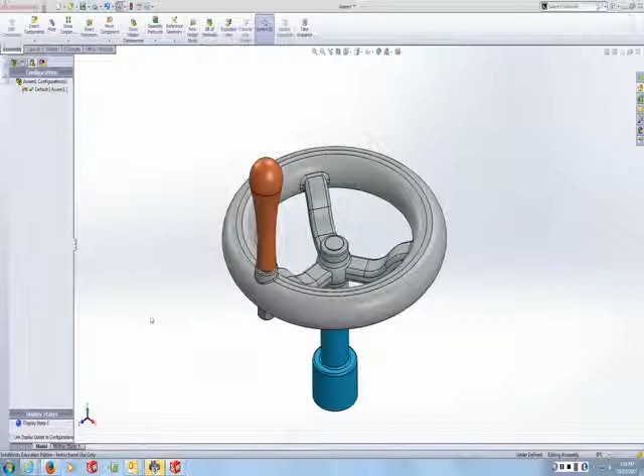Okay, today we're continuing our discussion about assembly drawings, or creating assembly drawings from an assembly. The first major step we've already gone through is mating all the parts together so that they fit and look like the thing would function. The next step is to take them apart, that is to explode them apart so we can see how the pieces go together. You'll see this in IKEA how-to manuals, how parts go together on furniture you bought, or just about anything you have to assemble yourself. This is going to be our assembly drawing. It will show each of the components as part of the assembly, an assembled view, an exploded view, bill of materials, and balloons.

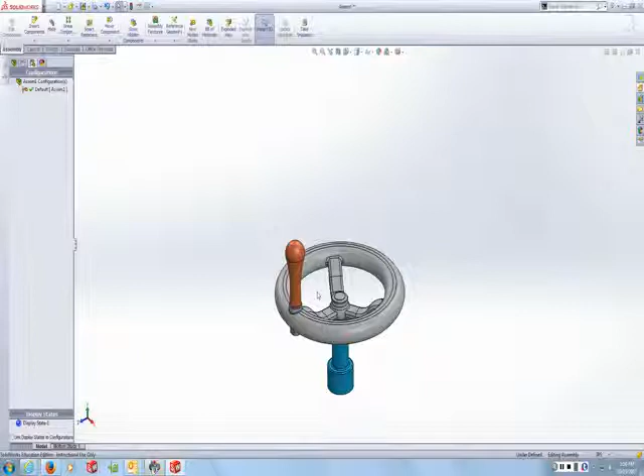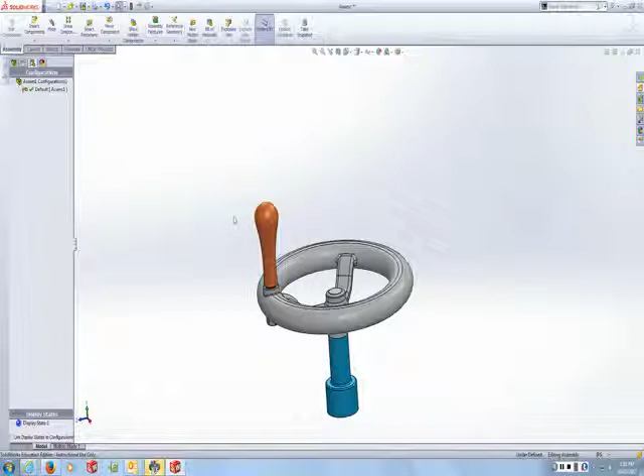So we've already mated this part together and walked through that. Now we want to explode it. Exploding is simple, but I decided to do it as one process. First I compose the picture, arranging my 3D assembly so I'm looking at it from the side I think is most useful. Since this has two parts coming down off the bottom of the wheel and only one handle going up, I'm just going to tilt it and look at it from underneath slightly.

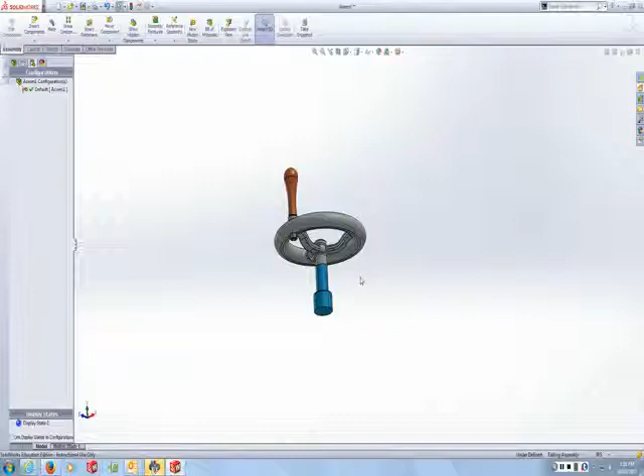I'm leaving it at the angle it's at—I don't really care that precisely. If it bothers you to have it at any slightly different than perfect angle, you can always use the arrow keys or adjust it by degrees. But I'm just adjusting it to a view that looks all right to me, and that's pretty much it. I'll zoom in a little bit.

Now I want to start exploding it, and as I explode these parts off, I really want to think about it as if they are physically real parts, just like we did when mating. We think about how they'd go together, how they'd function, and it helps us mate them in a more logical way. So as I look at this, I can take this pin or shaft off first by itself because there's nothing else related to it. But if I go to take the handle off, I can't just pull it off because the nut has to come off first in real life. The software will let us take things off in a magical way, but for layout and thinking purposes, we want to keep it as realistic as possible.

So I will take this blue guy first. Here's the process, it's pretty straightforward: go to the upper left of the screen to Configuration Manager. You were probably over here looking at your steps, the parts that created the assembly. Go back to Configuration Manager and right-click on the one that says Default—that means it's the default configuration, the only one created so far, the only version of this assembly that's assembled.

So I'm going to right-click on it and go to New Exploded View. Now if you read the fine print here in yellow, it's basically saying go grab a part, a component at a time, or a set of components, whatever way you prefer, and drag them where you want them to go in this assembly.

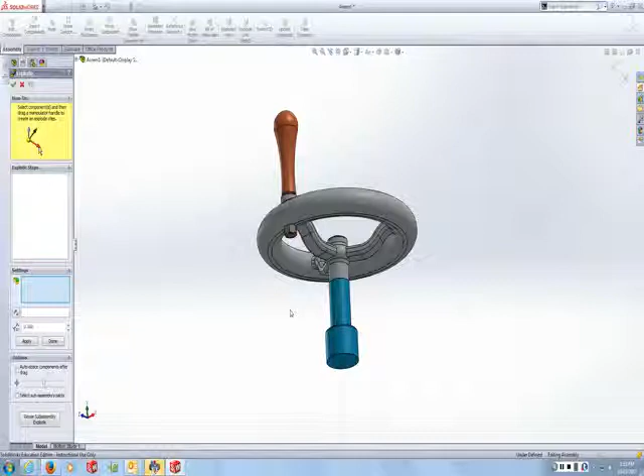So I'm going to grab the blue part first. Notice it changes color, letting me know it's been selected, and we get this triad here—I can grab any one of these arrows and drag the part in the direction of the arrow, either towards it or back against it. Again, think about it realistically: I really couldn't drag it in the blue arrow direction on a real part, or the red arrow direction. I'm pretty much stuck with this single axis.

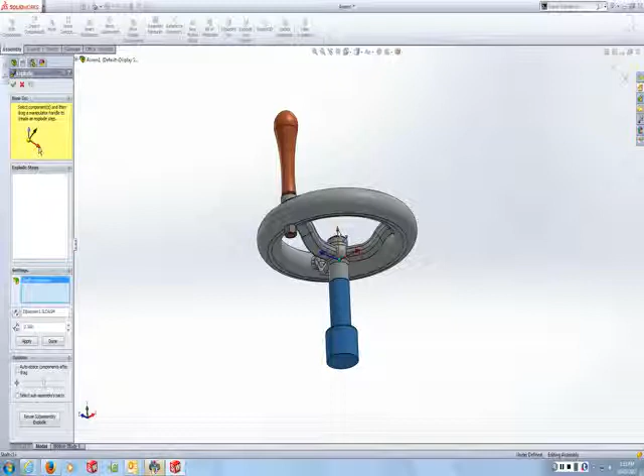So I grab this guy and just drag it down. The spacing doesn't matter much because we can adjust it at any time, but to save yourself some work, go ahead and space it as if you're composing your layout. So I'll just say that's far enough away.

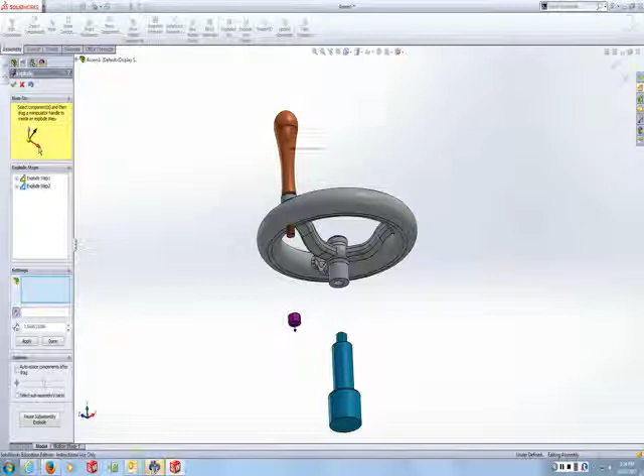Now I want to go grab these other parts. Again, thinking realistically, I'm going to grab the nut first. We aren't going to spin it off or anything—it's not that realistic, but it helps to think about it as if it's real. So then grab that green axis and drag that guy down. Then grab the other thing, the handle, and drag it up. I can see I'm going to run out of space here, so I'll zoom out a little bit, grab hold of that, and drag it up.

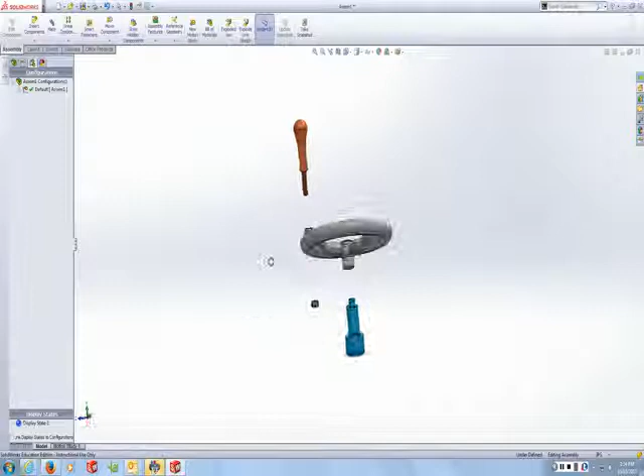Now I'm just going to keep that for a second because it looks fine, and we'll say we're done. So I'm going to hit the check mark over here and say we're good to go. I can look at that from any angle and see that I have exploded the parts away from each other, and it's perfectly fine.

However, sometimes you want to edit. You look at that and think, well, I got the nut a little farther away than I needed to, or what I think looks visually clear. So we can go back and edit the exploded view.

I'm going to expand this over here where it shows the default view. Right click on the exploded view we just created and select edit feature. In this case, the feature isn't a model per se, it's the whole assembly—in this case, the exploded assembly. So I want to edit that.

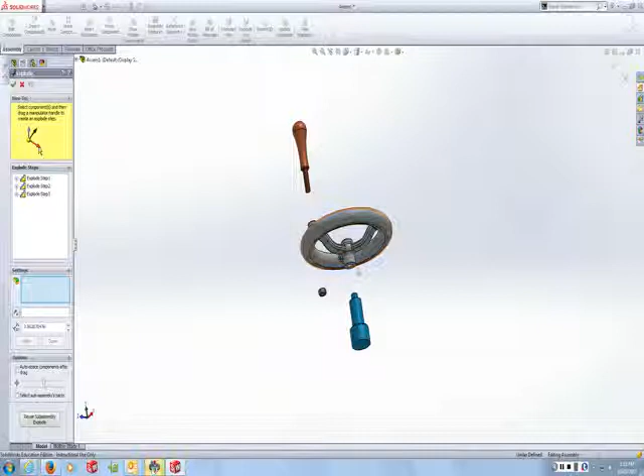So, edit feature. Now over here in the exploded steps box, it shows each part in the order that I grabbed it. If you click on one, it highlights the part that was moved first, then the part moved second, and so on. Okay, well, what did I want to edit? I wanted to edit the nut.

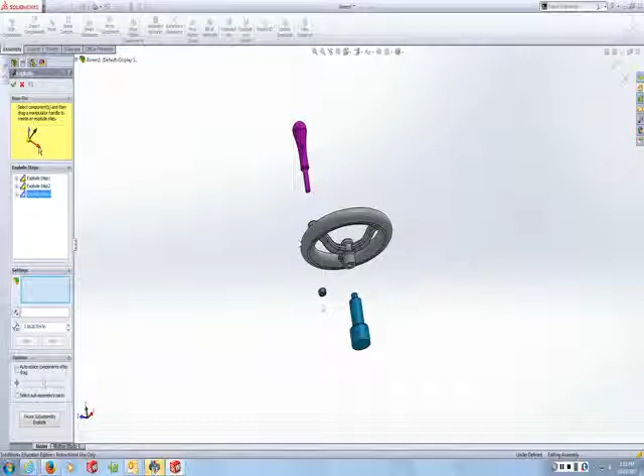Now here's a little bit of a warning. It's second nature for most of us to just start grabbing things on the screen, so we could grab this nut and drag it around. But if I do that, it'll add another explode step. It's already been moved down to here at that second explode step. If I want to move it further, the best way is to do what I just did.

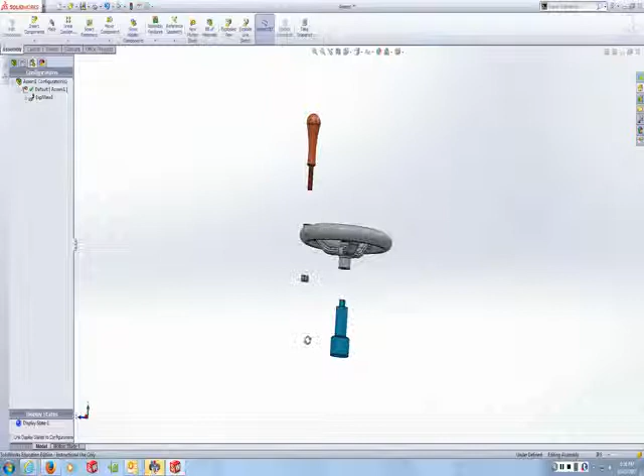Select it in the tree so we're editing that explode step, then grab the arrow and drag it farther or closer, whatever you intend to do. Let me reiterate that because it's pretty important: we can edit any of these, but there's no reason to add extra explode steps, extra work, extra processing, when all we wanted was to edit one of them.

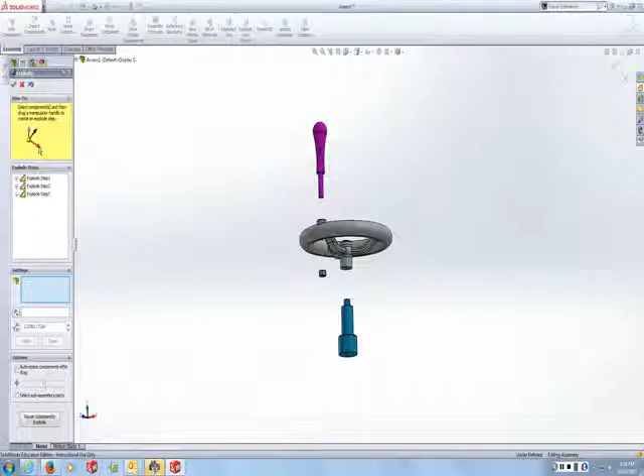So we go into exploded view, right click on it, edit feature, find the step we want to edit. I want to move the handle a little closer. Go find that handle, grab the little blue arrow, and drag it a bit closer. It's a visual adjustment anyway—I don't need exactly 2 inches or 5 inches, I'm just trying to make sure my drawing and assembly is clear. When I'm done, I say OK.

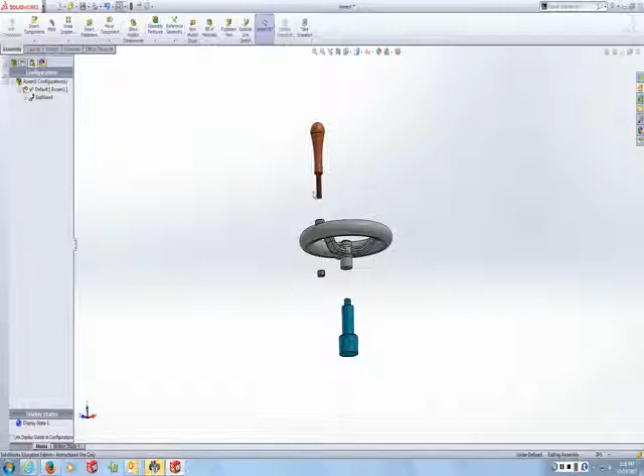The next step is simple, and I wouldn't call it required in all cases, but sometimes it really helps, especially on complex assemblies, to put in an explode line—an axis line showing how these parts go together. With SOLIDWORKS it's pretty easy. Basically what I'm going to do is go up to explode line sketch.

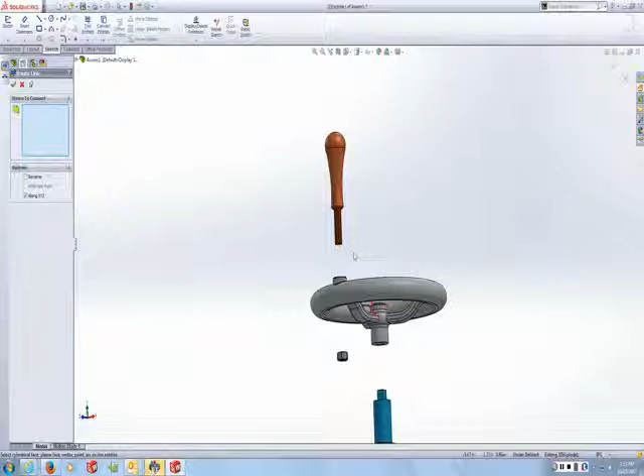It says items to connect. First tip: I want to put an axis line in on this between the handle where it connects to this guy and the nut. I could grab each cylindrical piece that makes up the middle of this, but I recommend, if you have a whole bunch of parts in line with each other and you know they're in line, grab the first cylinder at the top of the string, then the last piece at the other end. That way you only have 2 selections, and you know you've got a single line going down through all of them. That's what I'm going to do here.

I'll tip this so I can see the cylinders better, zoom in some. I grab this cylinder—it looks like it's got threads on it, but they're just cosmetic, so there's really a true cylinder there. Check this arrow, make sure it's aiming down in the direction you want this axis line drawn. I can toggle it by flipping it, but otherwise when I go down and grab the next one, it'll go out of that pin or bolt, up the handle, and then come back down.

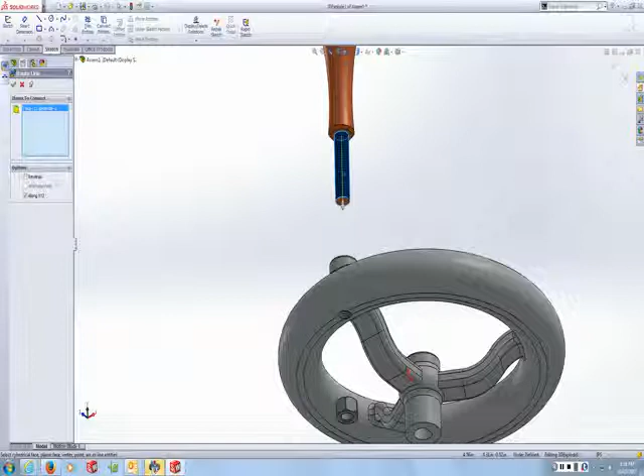And that's not what we intend—we want it to just go straight down. So make sure the arrow is aiming in the direction you want. Then grab the last cylinder in the set of concentric pieces you're doing, and say OK. Now we've got an axis line going down through those parts. I'll get out of it so you can see it just stays there in 3D space.

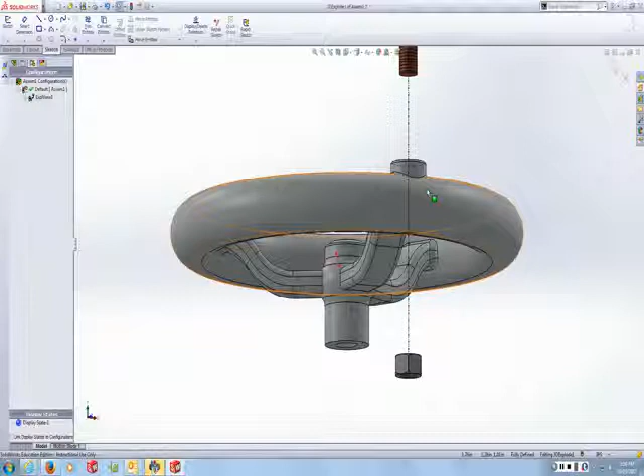Right now, depending on how it refreshes the screen, sometimes you'll see the line crossing over other parts. Don't let that bother you—like right now you can see the lines going through all the parts. When we get to the drawing, it goes through a cleanup process that makes sure you only see the line in the gaps between parts, not laying right on top of them. So we've got that one. Let's go do the other.

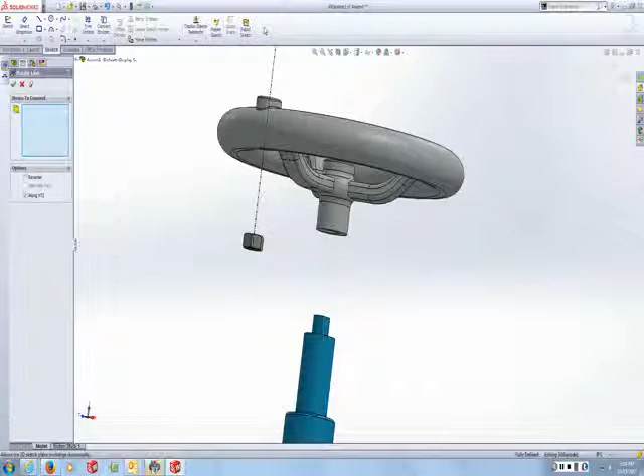Same process—I'm going to go under the assembly toolbars to explode line sketch. We're actually already in it, but just so you can see this from scratch, I'm going to close that down. There's the one we already created. I'm hitting explode line sketch, and I grab the cylinders that I want to align with.

Check that arrow, because sometimes it really will be aiming the other way, and then grab the next cylinder, or the last one if there's a whole bunch of them. It's ready to go—we say OK. Check that.

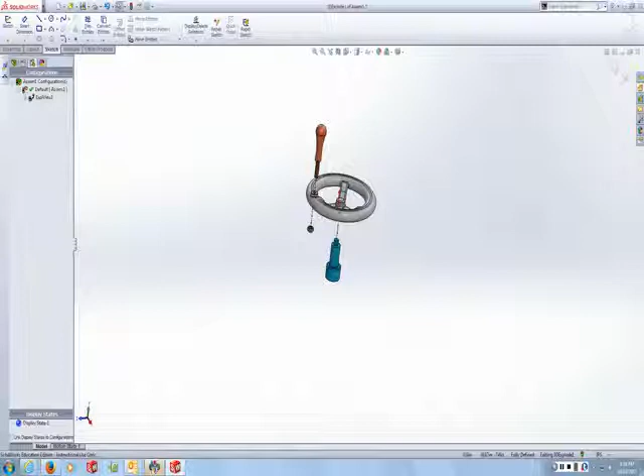So now we've done what I'll call the second step to the assembly drawing process. We had modeled all the parts, mated them together in the last demo I did on this subject, and now we've exploded them. We can compose the picture. In the next video, we'll talk about where you go from here. Basically, we're done with the modeling aspects of the full physical 3D components.

Now we're going to go over and start a drawing—arranging views, balloons, bill of materials, etc.